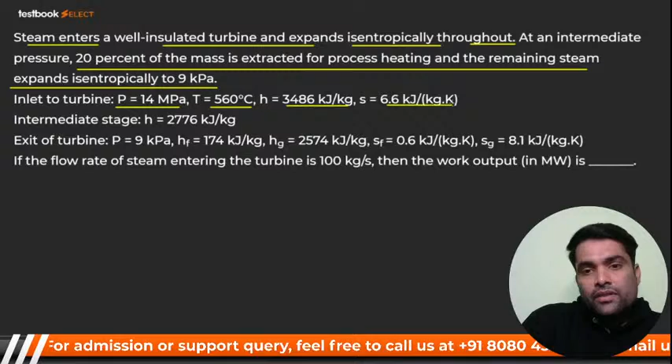Steam enters a well insulated turbine and expands isentropically throughout. At an intermediate pressure, 20% of the mass is extracted for process heating, and the remaining steam expands isentropically to 9 kilopascal. At the turbine inlet, pressure, temperature, enthalpy and entropy are given. At the intermediate stage, enthalpy is given. At the exit of the turbine, pressure is given along with enthalpy of liquid, enthalpy of vapor, entropy of liquid and entropy of vapor - these 4 properties are given.

If the flow rate of steam entering the turbine is 100 kg per second, then we have to calculate the work output in megawatt.

Good afternoon to all of you who have already joined. Now we have to calculate power in megawatt - what do we need to calculate? We have to calculate power in megawatt. So now we are going to start.

But we have to start from the diagram. So my dear, it is nothing but a case of regeneration right now.

Let me draw the diagram so that you have a clear picture of what is being said. See my dear, it is TS, it is your TS diagram. I hope it's visible to you. It's not visible, let me turn off the sticker for some time, then I'll turn it on. TS, okay bacha party, see. Now I'll draw the TS diagram, see here.

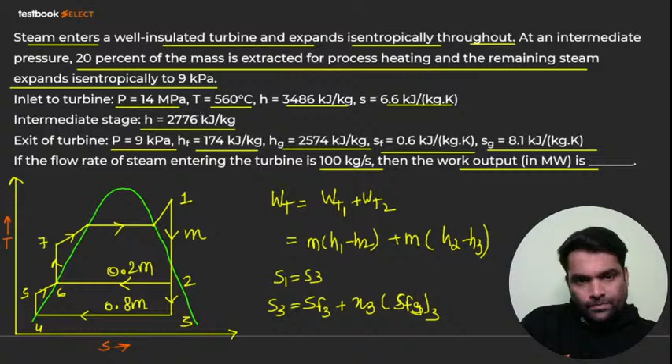H1 is 3486 minus H2. How you can calculate H2? H2 is 2776. Right, given in the question itself. See.

Plus 0.8, because 20% was removed from here. H2 2776 minus 2094, you'll get W net.

It will be around, how much is it coming? What is the magnitude? 125.560. 125560 kilowatt, you can convert it into megawatt, that should be 125.56 megawatt. This will be the required answer.

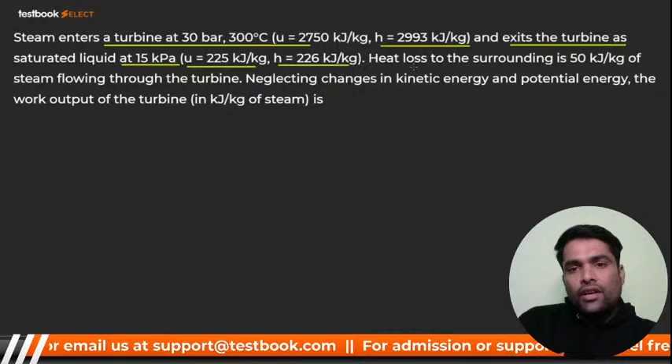Another question. Steam enters a turbine at 30 bar, 300 degrees centigrade. Enthalpy, specific enthalpy and specific internal energy are given, and exits the turbine as saturated liquid at pressure 15 kilopascal. Specific internal energy, specific enthalpy given. Heat loss due to surrounding is 50 kilojoule per kg of steam flowing through the turbine. Neglecting changes in kinetic and potential energy, the work output of the turbine is?

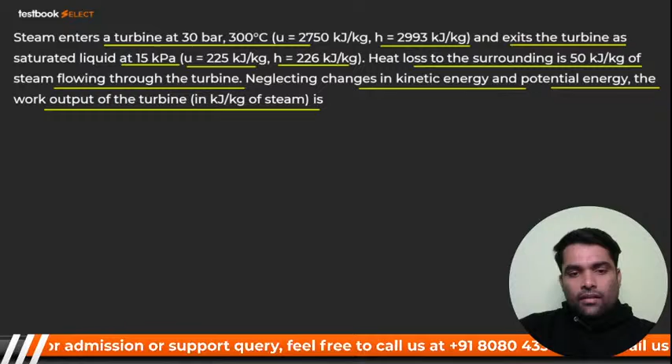Yes Muthu, can you tell me how we can solve? It's very simple. H1 and H2 are given. See, H1 is how much? 2993. They have given H2, that is 226, right?

Q is given. Q is how much? Heat loss minus 50. And we have to calculate work done. So, neglecting kinetic and potential energy, steady flow energy equation is H1 plus Q is equal to H2 plus W.

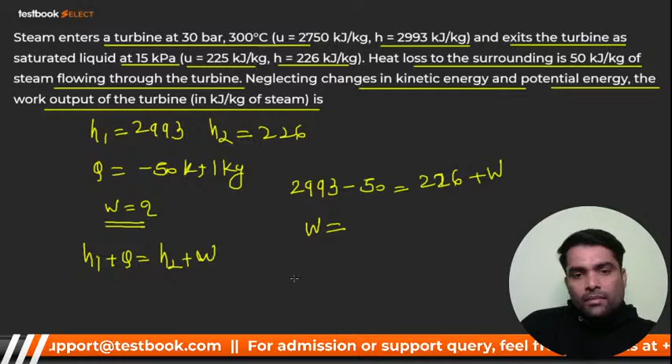So H1, that is 2993, minus 50, because it's rejection now, equals H2, which is 226, plus W. From here you'll get W, and your W will come around 2717 kilojoule per kg, and this will be your required answer.

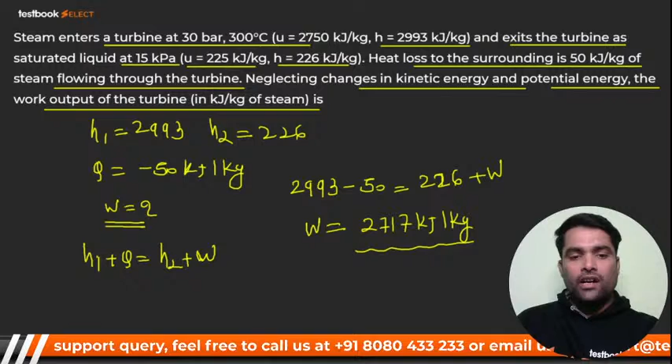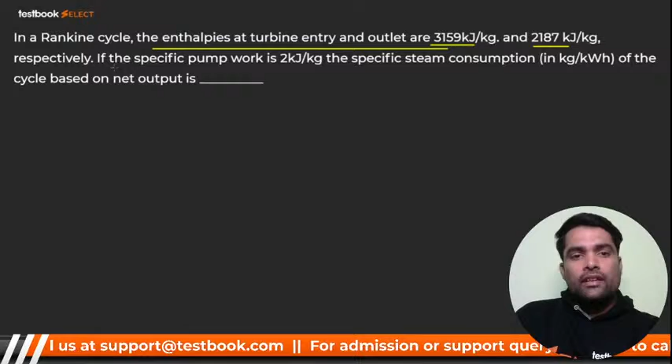In a Rankine cycle, the enthalpies at turbine entry and outlet are given respectively. If the specific pump work is 2 kilojoule per kg, pump work is also given, that is WP.

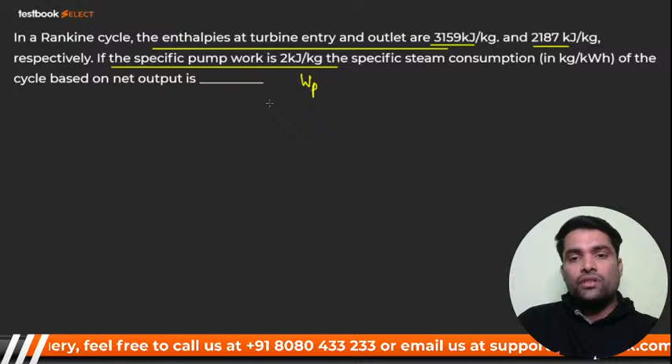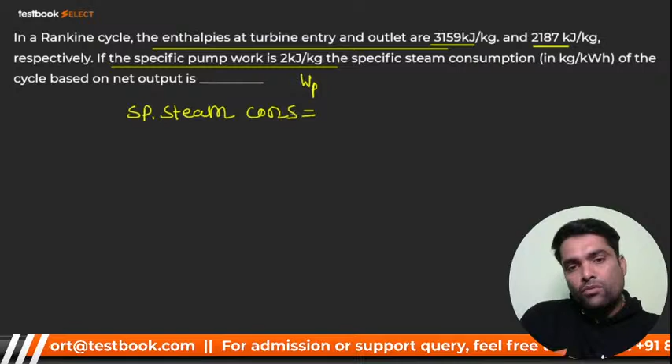We have to calculate specific steam consumption. That I already told you, is nothing but 3600 divided by W net, kg per kilowatt hour.

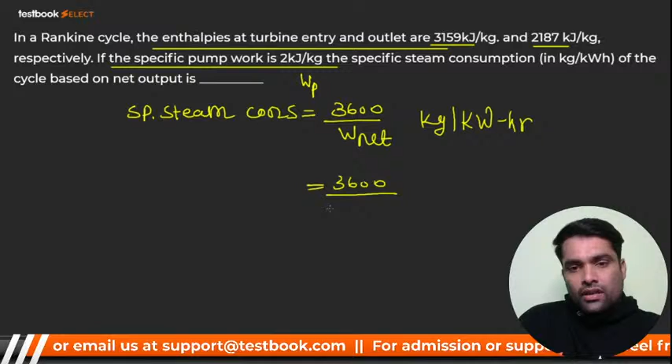So 3600 by W net, they have given, it will be 3159 minus 2187 minus 2. Now you have the answer, the answer is 3.71 kg per kilowatt hour.

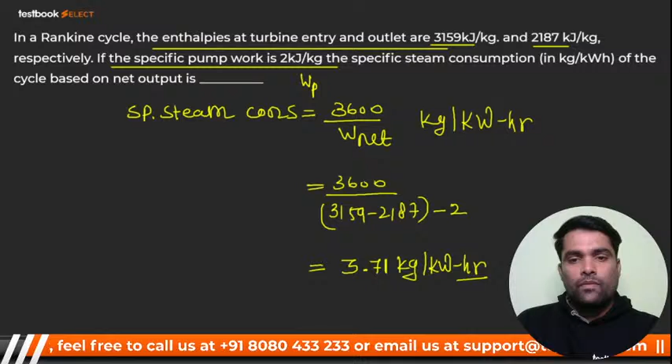In a steam power plant operating on an ideal Rankine cycle, superheated steam enters the turbine at 3 megapascal and 350 degrees centigrade. The condenser pressure is 75 kilopascal. We have to find the thermal efficiency of the cycle in percentage, and they have given some data and properties over here.

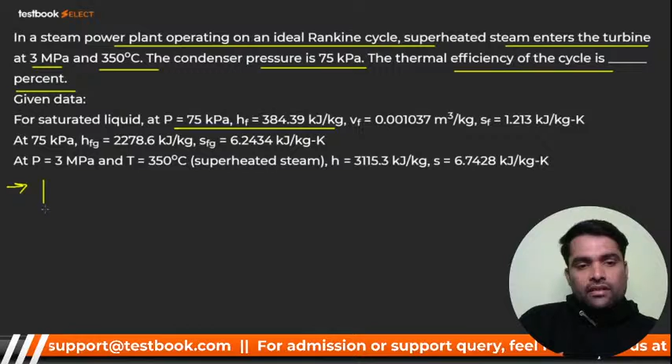We have to calculate thermal efficiency. So how we can calculate? It's very simple, funda. Let me draw the diagram first. See, this is your TS diagram.

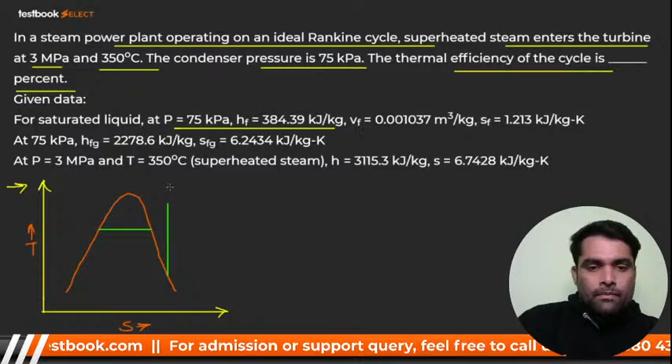One, two, three, four.

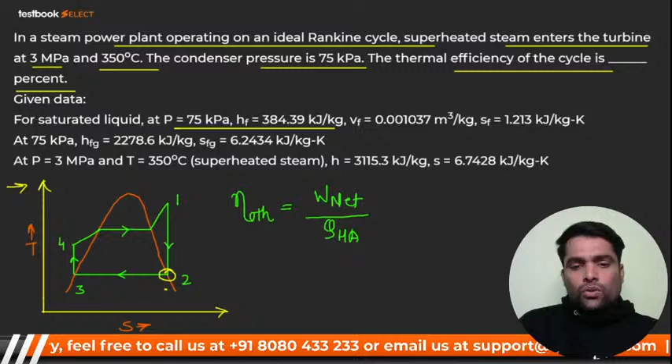H1 we know, it is given, right? 3 megapascal. This H1 is given, right? We don't know S2. But you know that S1 is equal to S2, right? And S1 is how much? S1 is 6.7428. I can write S2 in the form of what, my dear?

SF2 plus X2 into SFG2, right? So my dear, I can write it like: 6.7428 is equal to SF2. So my dear, see SF2, point number 2, which is at where? Let me check, it is how much? It is SF2, that is 1.213. Very good. Here, again I'll write over here, that is 1.213 plus X2.

What is SFG? SFG means SG minus SF. So it is none other than what, bacha? Here it is given, you can see this, my dear. So you can directly write 6.2434. Right, my dear. From here you will get X2, and your X2 will come around - how much is it coming, bacha? 0.8857.

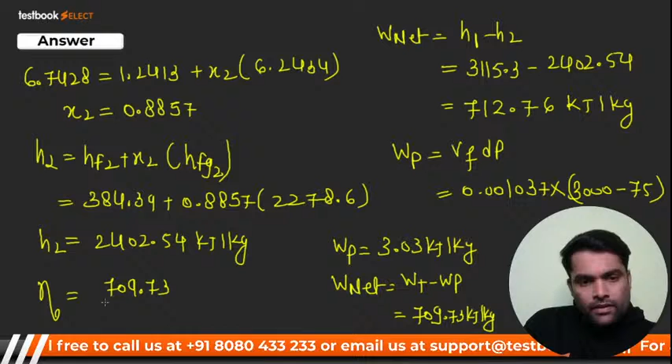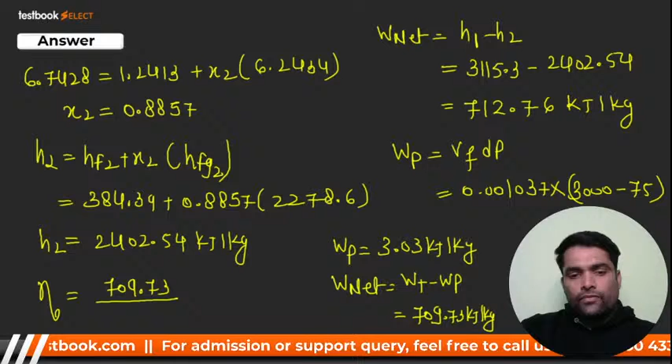Okay, efficiency will be, my dear, then 709.73. Heat added, how much will it be here? Yes, that should be H1 minus H4. Very good, that is heat added. We don't know about it. So my dear, heat added will be nothing but H1 minus H4. You can see in the diagram, right?

But my dear, WP is nothing but what? WP is H4 minus H3, right? That is 3.03. So from here, my dear, you'll get it, because you know H3. H3 is how much? H3 is nothing but HF, at 75 kilopascal.

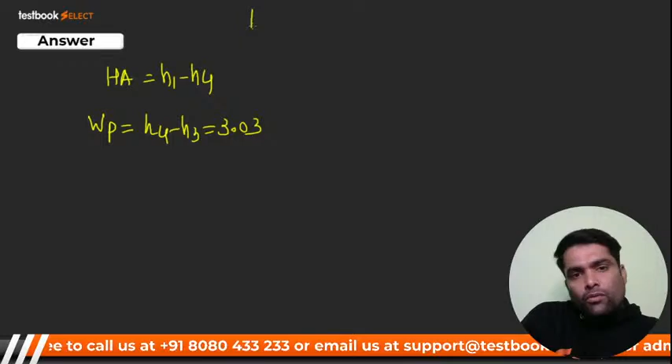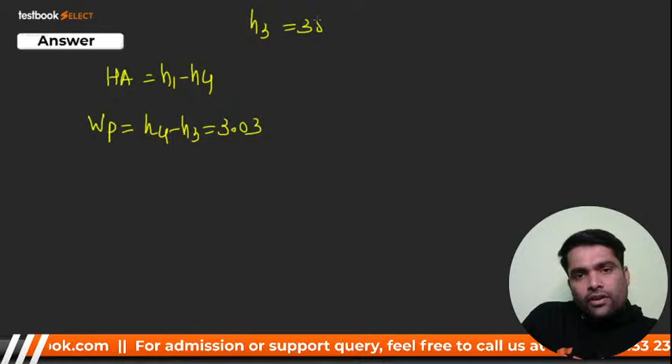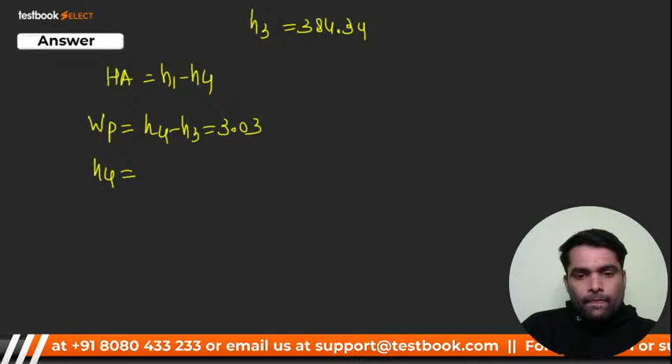What is H3? You can check it out in the diagram. H3 means HF at 75 kilopascal. That is none other than 384.39. So my dear, H3 is 384.39. From here I'll get H4. H4 will come around 387.42. This is your H4.

If you got H4, now my dear, you'll get Q heat added. That is none other than H1, which you know already. H1 we have the value, 3115.3.

Whatever it may be, minus 387.42. So, my dear, efficiency will be 709.73 divided by 3115.3 minus 387.42, and eta will be how much? That is 26.01. Okay, this is the required answer. Yes, it's quite lengthy, but that is quite easy.

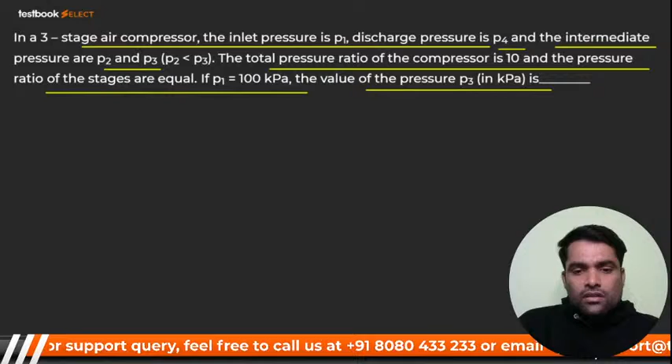Okay, bacha party, I hope you got it. Here I go for the next one. In a three-stage air compressor, the inlet pressure P1, discharge pressure P4, and intermediate pressures P2 and P3, with P2 less than P3. The total pressure ratio of the compressor is 10. The pressure ratio of the stages are equal. If P1 is equal to 100 kilopascal, find the value of P3 in kilopascal.

How can we see this? Let me tell you. What is the arrangement? Here we have a three-stage compressor, three compressors connected in line: C1, C2, C3. Here pressure P1, here pressure P2, here pressure P3, here pressure P4. They said P2 by P1 is equal to P3 by P2, which is equal to what, my dear? P4 by P3. Am I right? This is what is being said. Now we have to calculate P3, right? What do we need to calculate?

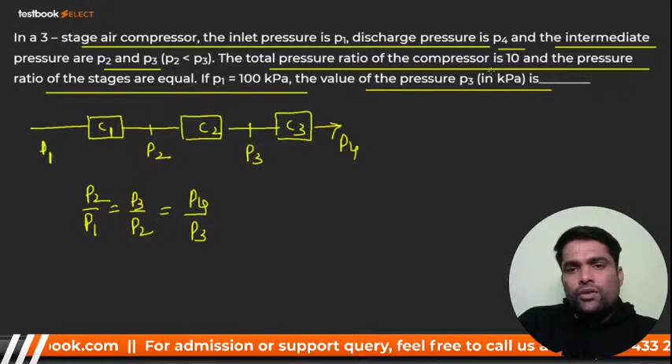Okay, so my dear, now listen to me very carefully. P3 is equal to, if P2 by P1 is equal to this value, so can I say this is the pressure ratio? So can I say P2 is equal to pressure ratio into P1, right? Of course I can say. Now, P3 will become what, my dear? Number of stages, what will it become? P3 is equal to P1, that is 100 multiplied by 10 raised to power 2 by 3. So how much will it come to? It comes around 464.14 kilopascal. And this we have already seen.

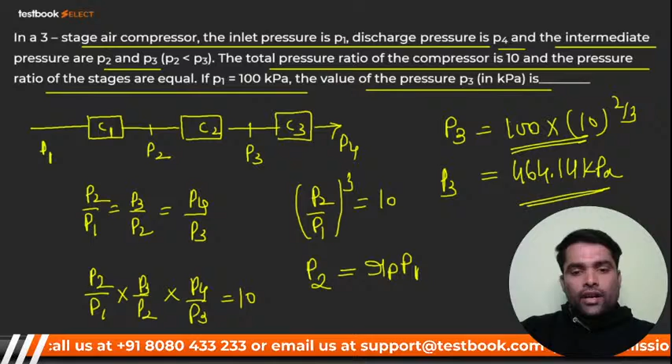Where have we seen it? We have already seen this in centrifugal multi-staging, right? We saw that thing there. Very good. Yes, guys, had you got it? If you got it, then please tell me. If you have any doubt, then please let me know, my dear. We'll go for the next one.

In the Rankine cycle of the steam power plant, the turbine entry and exit enthalpies are given. The enthalpies of water at pump entry and exit are also given. They are asking for specific steam consumption.

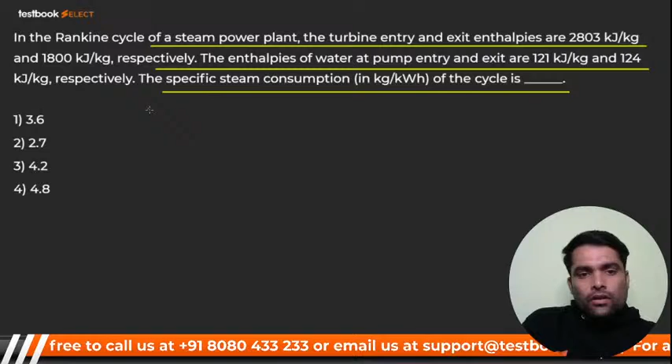Let's see what happens. You know that WT will be what? 2803 minus... very simple question, that gives us this, that means what?

1003. WP will be what? 121 minus 124, that is what? 3 again. 124 minus 121, that is again 3. So W net will be what? 1003 minus 3, that is 1000.

Specific steam consumption, SSC, that is nothing but 3600 divided by W net, that is 1000. So what will this become? 3.6 kg per kilowatt hour, right?

I hope you got it. Very good, that's a very simple question. Okay, now I'll go for the next one.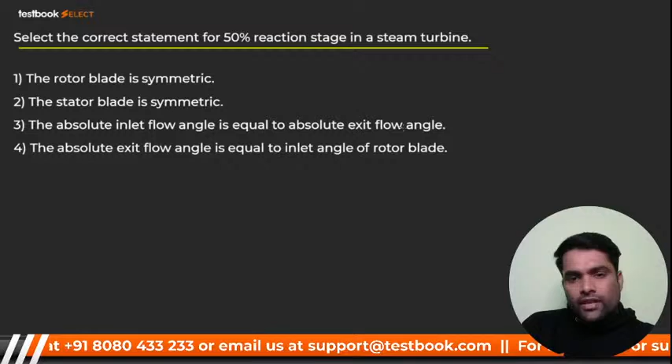Is rotor blade symmetric? No. Is the stator blade symmetric? No. Is the absolute inlet flow angle equal to the absolute exit flow angle? No. Is the absolute exit flow angle equal to the inlet? Yes or no, what happens in this?

Alpha 1 is equal to beta 2. Alpha 2 is equal to beta 1. VR1 is equal to what? V2. VR2 is equal to V1. This is the condition, right now?

So this will be what? Option number 4 is going to be correct answer, right? Yes or no? Had you got it?

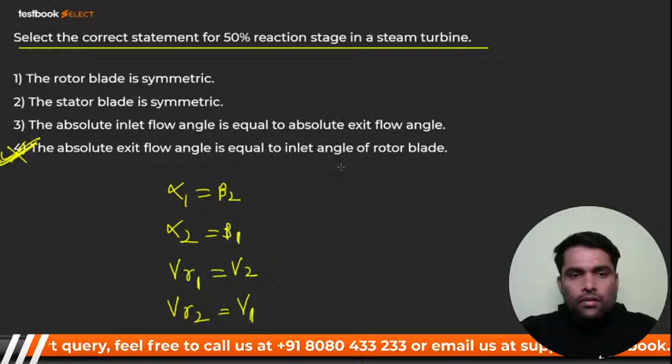Are you able to understand? Yes or no, please tell me. Okay, let's move on. Next question please, see. Wait.

A gas turbine with air as working fluid has an isentropic efficiency of 0.7 when operating at a pressure ratio of 3. Now the pressure ratio of the turbine is increased to 5 while maintaining the same inlet condition. Assume air as a perfect gas with specific heat ratio gamma 1.4. If the specific work output remains the same for both cases, the isentropic efficiency of the turbine at...

The value of gamma is 1.4, and specific work output remains the same. Isentropic efficiency of turbine at the pressure ratio of 5 is what we have to calculate, my dear.

So first we are going to see, because we have two cases over here, we'll see the cases one by one, taking them one at a time, right? So first of all, let me draw the diagram.

So the diagram will be like this only, let's draw it here. I hope it's visible to you, let me check... okay that's very good, it's visible. So, see.

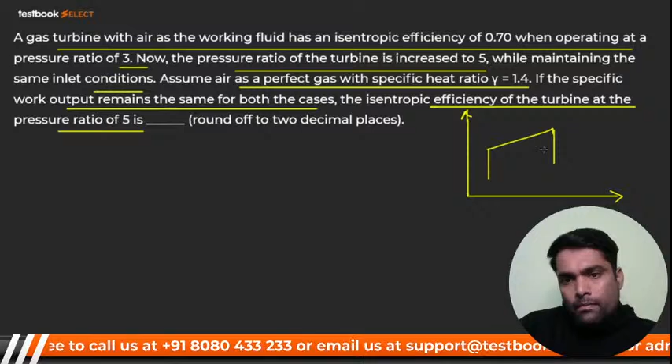Okay, it is 1, it is 2, it is 3, what? It should be 4 and 4 dash, 4 and 4 dash. It is T, it is S, right? Now, see.

Now I will write the expression for the isentropic efficiency. Yes, anybody have any doubts, please let me know. Okay, so here I go.

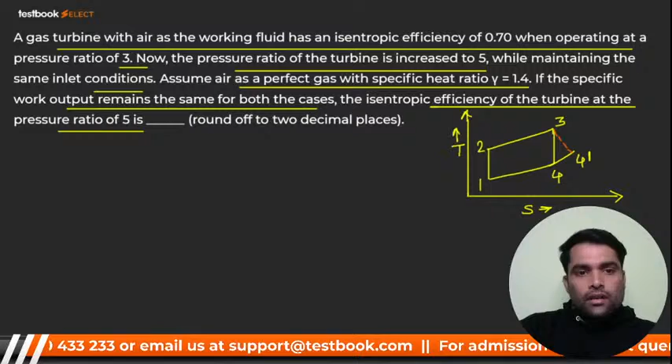So what will it be? What is the turbine's efficiency? It should be T3 minus T4 upon T3 minus... it should be T3 minus T4 dash. I'm sorry, the isentropic efficiency of turbine is what? It should be T3 minus T4 dash divided by T3 minus T4, right? Because ideally the work will be more, right? Yes or no?

Of course it should be. Okay, if you got this point, now I'll go. Pressure ratio is 3, gamma is 1.4, right? So I'll put the values. But before that, I'm going to calculate T4.

Let's find the relation between T4 and T3. Now you know T4 by T3 will be what? It should be P4 by P3 raised to power gamma minus 1 upon gamma. So that will be nothing but equal to P4 by P3.

How much is it? It is given in the question, right? Pressure ratio is given. That is none other than 3. How much is given? 3. Okay, of course it is, right?

So see the diagram. Now P4 by P3, but they have given us P3 by P4, no? So it should be what? P3 by P4, that is what? P4 by P3. So here what will we take? 1 upon 3 raised to power 0.4 divided by 1.4, right?

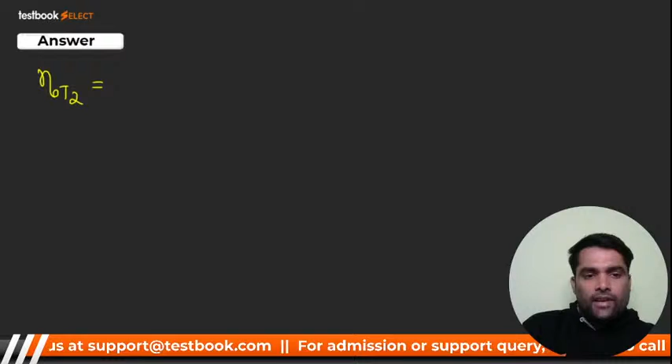Now we'll go for the second case. First case we've seen, now let's see the second case of turbine, right? Now the pressure ratio is how much? 5. So again pressure ratio is 5, no?

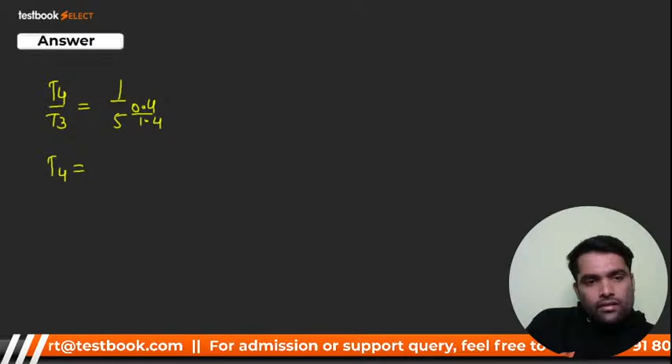So can I say again T4 by T3 is equal to 1 upon 5 raised to power 0.4 divided by 1.4? So from here I'll get T4, and this T4 is equal to how much? This T4 is equal to 0.631385 T3, right? Now I have efficiency for turbine 2.

So that is nothing but T3 minus T4. So here I'll put T3 minus T4 dash, it is what? 0.631385 T3, right? This is your second equation, okay.

So this is your efficiency in the second case. Now we got efficiencies in both the cases, right? Now what I'll do, I will equate them. And they said specific work output is same for both the cases, right?

That means specific work output is same in both the cases, right? Work output will remain same now. So here I will write H3 minus H4 dash in first case is equal to H3 minus H4 dash in second case. It will be equal in first or second case.

Now, can I say like this? That means if it is equal, can I say T3 minus T4 dash in first case is equal to T3 minus T4 dash in second case, right? If it is so.

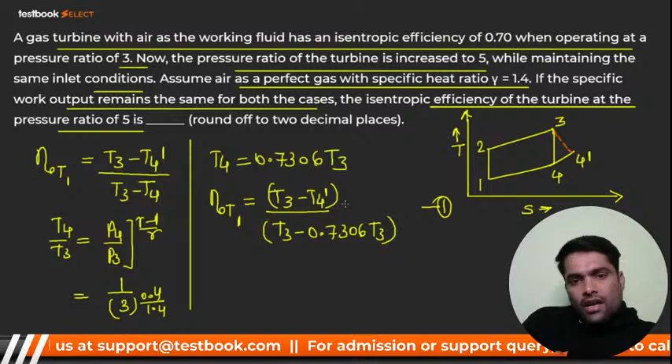It is what? Again I am telling you, this is T3 minus T4 dash, right, for first case and second case, both are equal, right now. So what will we get? What will I get? I'm going to get 1 minus 0.7306. What will remain with me?

1 minus 0.7306 T3, divided by 1 minus 0.631385 T3. These terms will cancel out now. So we get a ratio - the ratio will be 0.73084. If you get this ratio, eta 2 is nothing but 0.73084 times.

So eta t2 will be what? 0.73084 multiplied by eta t1. And eta t1 is what? So eta t2 equals 0.73084 multiplied by 0.7. From here you'll get the answer, and the answer will come 0.5116.

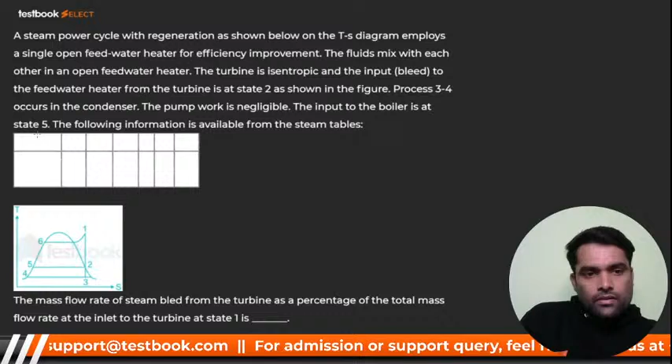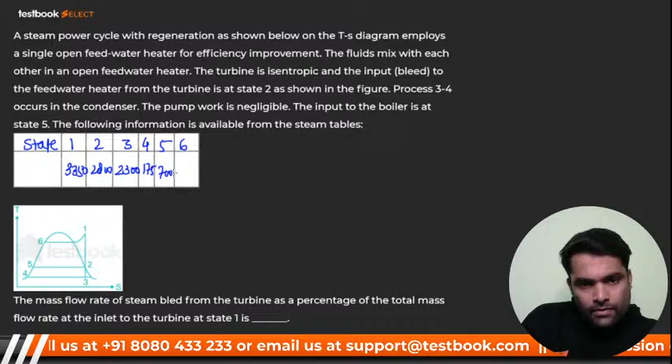And these are enthalpies in kilojoule per kg, that is small h. States are given, each and everything, the diagram is given, right?

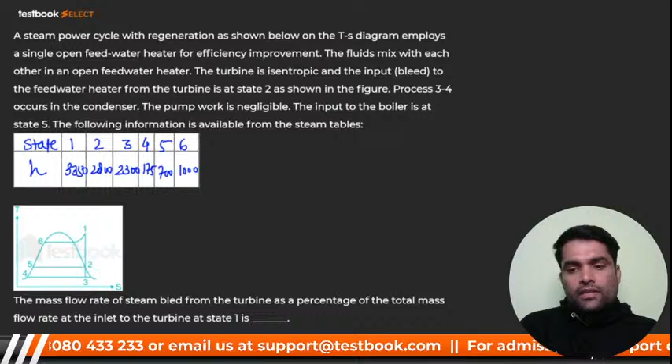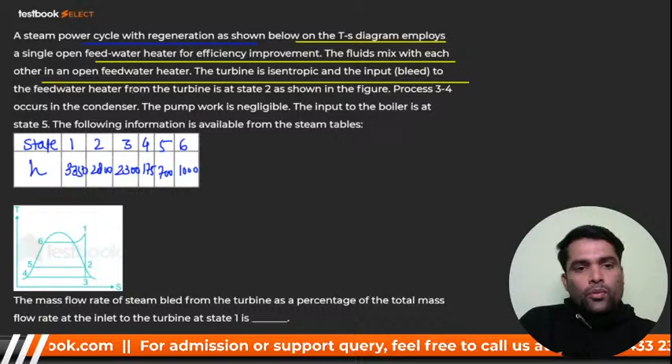So now we have to calculate what they said: a steam power cycle with regeneration as shown below in the T-S diagram employs a single feed water heater for efficiency improvement. The fluids mix with each other in an open feed water heater. The turbine is isentropic, and the input to the feed water heater from the turbine is at state 2 as shown in the figure. The process 3-4 occurs in the condenser. The pump work is negligible, that is Wp equals 0. The input to the boiler is at state 5. The following information is available.

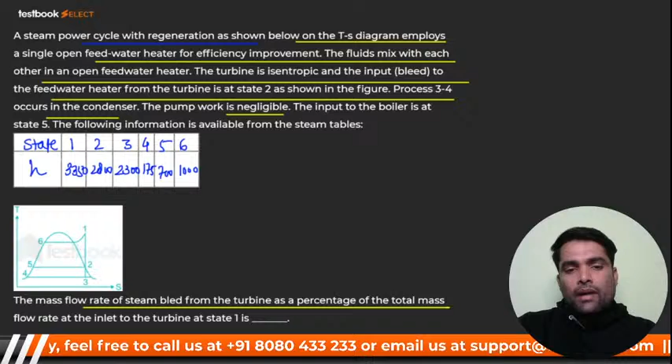The mass flow rate of steam bleed from the turbine as a percentage of total mass flow rate at the inlet to the turbine, state 1, is given. We have to calculate the mass that we extract for heating purpose.

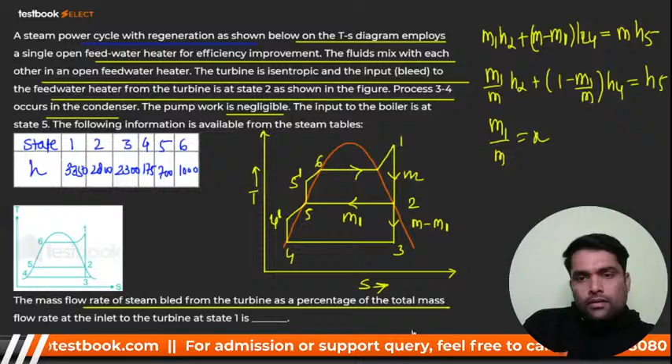I'll get M1 by M into H2 plus 1 minus M1 by M into H4 equals H5. I'll put in the values and get the answer. Let's take M1 by M as X. So X into H2 plus 1 minus X into H4 equals H5.

OK, so can I write directly X into H2 minus H4 equals H5 minus H4? Of course I can write this. If you write this, you will get X.

Now you will get X, and that equals H5 minus H4 divided by H2 minus H4. So H5 is already given as 700, H4 is 175, H2 is 2800, minus 175. You'll get X. How much will X be? X will be 0.2.

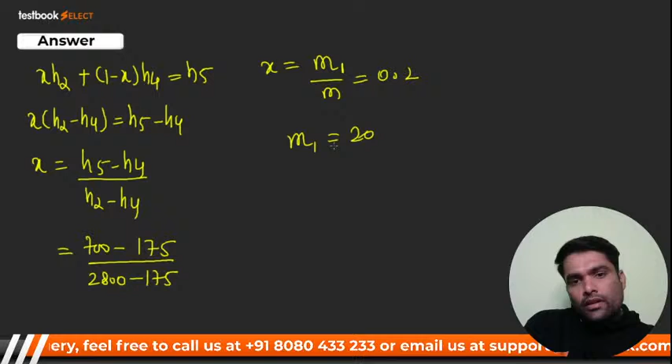That is 0.2, which is 20 percent. X is nothing but M1 by M, and that comes to 0.2. So M1 will be 20. This will be the correct option, 20. Very good, Mahendra. M1 will be 20 percent. Remember, your answer should be 20 percent. Now let's move ahead.

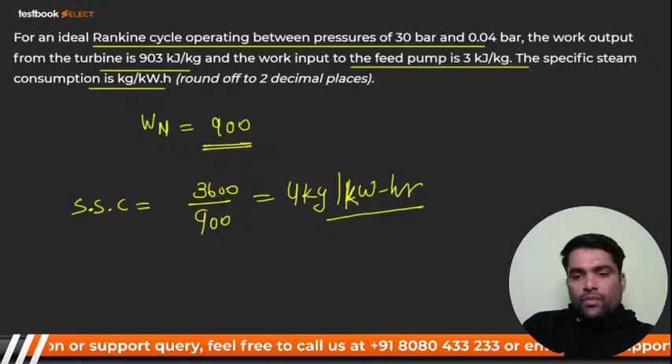An ideal gas enters a perfectly insulated compressor at temperature of 310 Kelvin. Pressure ratio of the compressor is 6. Specific heat at constant pressure of air is 1005 joule per kg Kelvin. Ratio of specific heat at constant pressure to constant volume, that is gamma, is 1.4. Assuming specific heats of air are constant, the isentropic efficiency of compressor is 85%. Find the difference in enthalpies of air between exit and inlet of compressor, in kilojoule per kg, rounded off to nearest integer.

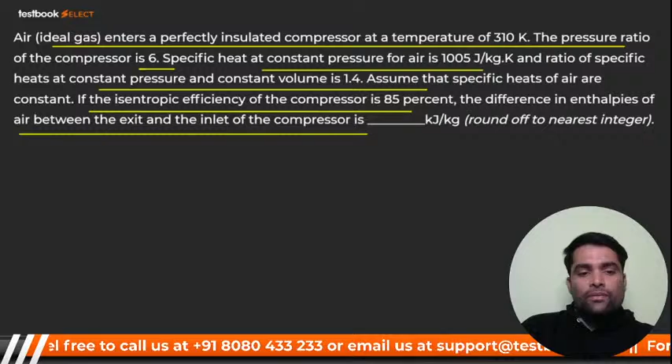How can we solve this? It's very simple, nothing much in this question. I'll repeat once again, they are asking for the isentropic efficiency. So this is our Brayton cycle.

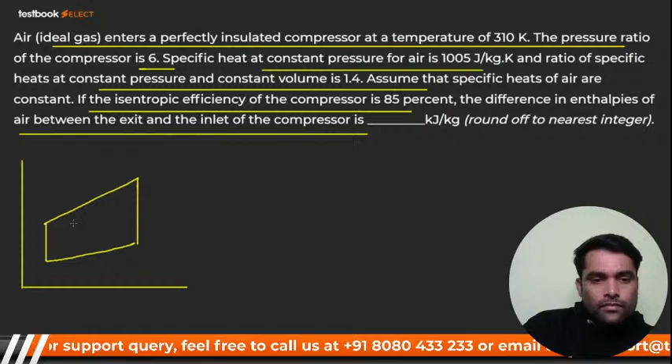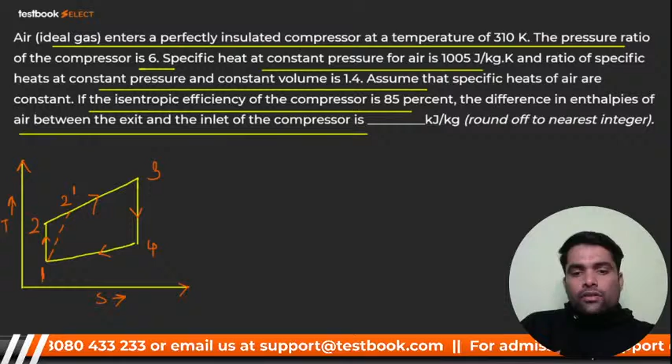This will be your actual cycle, going 1-2-2 dash-3-4. Now it will be like this on the TS diagram. So if it is TS, then here, what will this be? H2 minus H1 upon H2 dash minus H1, right?

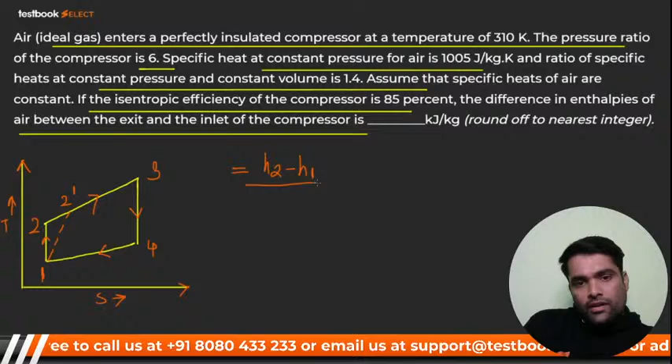Now very good. It should be H2 minus H1 divided by H2 dash minus H1, and that is nothing but W ideal upon W actual.

W actual will be more than W ideal, right? W actual is nothing but W ideal divided by efficiency of compressor. W ideal you can get as Cp into T2 minus T1. So Cp into T2 minus T1 divided by eta compressor, and that will be around... how much is that?

So here I'll go, that is Cp equals 1005, T2, let me check how much it is. It is 310. What about the ideal gas enthalpy? What is the actual value? 517.22, right?

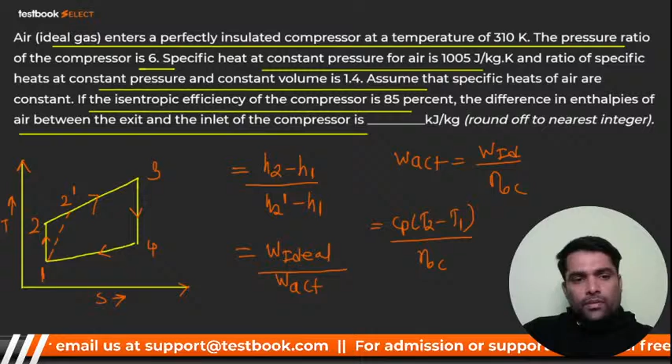T2 we have to find out, we still haven't found T2, right? T2 we don't have yet. So we have to find T2. T1 we know is 310, and it is 0.85.

T2 by T1 is nothing but P2 by P1 raised to power gamma minus 1 upon gamma. Gamma is 1.4. From T2 by T1 equals pressure ratio, how much is the pressure ratio? Pressure ratio is given as 6. So it's 6 raised to power 0.4 divided by 1.4.

From here you'll get T2, and that will come around 517.22. You'll put the value, that is 517.22, and you'll get W actual, which will be around 245 kilojoule per kg. This will be the required answer.

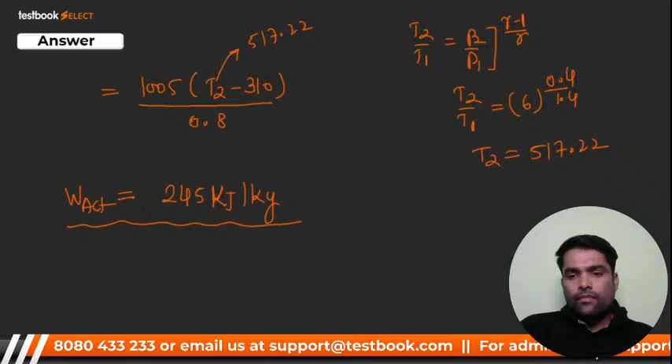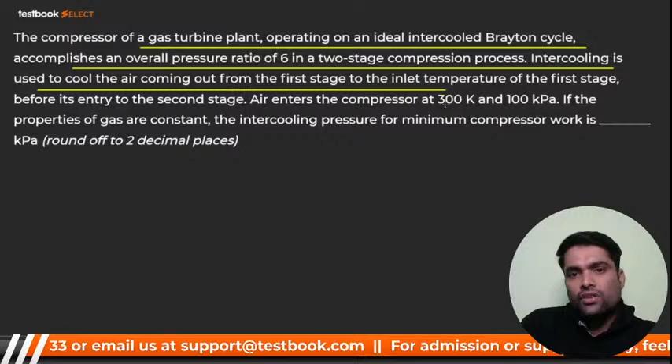Listen to me very carefully. The compressor of a gas turbine plant operating on an ideal intercooled Brayton cycle accomplishes an overall pressure ratio of 6 in two-stage compression process. Intercooling is used to cool the air coming out of first stage to the inlet temperature of the first stage before its entry to the second stage. Air enters the compressor at 300 Kelvin and 100 kilopascal. If the properties of gas are constant, find the intercooling pressure for minimum compressor work.

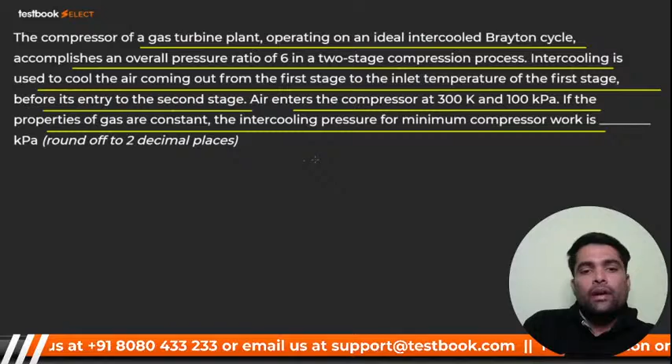You know that P2 is nothing but under root of P1 P3. We have already studied this. That is 100 into how much? It's a 2 stage problem, right? Intercooling between overall pressure ratio 6, 2 stage compression, right. So first stage, we have to calculate that.

How much will P3 by P1 be? P3 will be 600. Good afternoon Tanmay Soni, most welcome. So intermediate pressure, P3 will be what? P3 will be P1, that is 100. What is the ratio given, 6? That is 600.

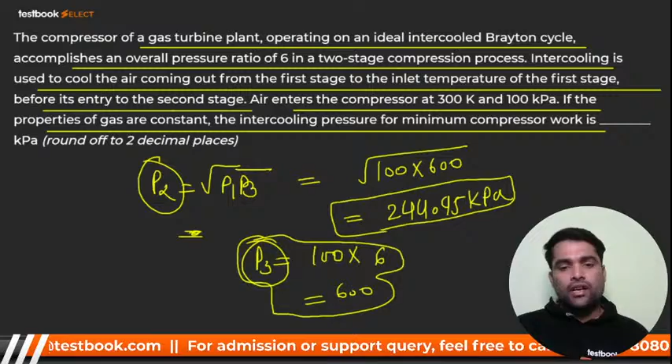First you were given the pressure ratio 6. By the help of that you can find P3, and once you get P3, you know that for minimum work input, the condition is that intermediate pressure or intercooling pressure is nothing but under root of the product of lower and maximum pressure. I hope you got it. Tanmay Soni, you are most welcome in the session. Okay, so now we'll go for the next one.

Which one of the following is the incorrect statement about regeneration in vapor power cycle? Incorrect, remember, incorrect statement we have to choose regarding vapor power cycle. Be fast. See, I'll read the questions.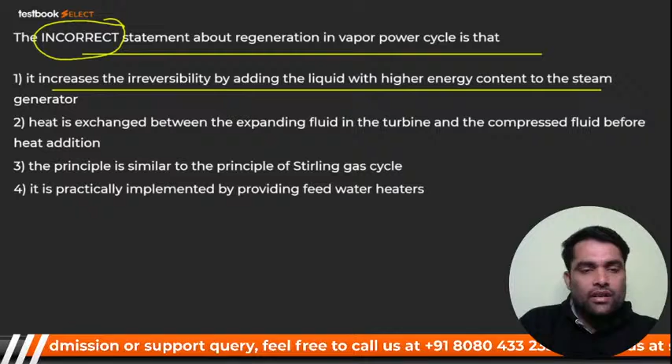It increases the irreversibility by adding the liquid with a higher energy content to the steam generator. Heat exchange between expanding fluid in the turbine and compressed fluid - right, there is no issue, it's correct. I think this is incorrect: increase the irreversibility by adding liquid with a higher energy content - no, no, no, it does not. That is number 1, which is incorrect.

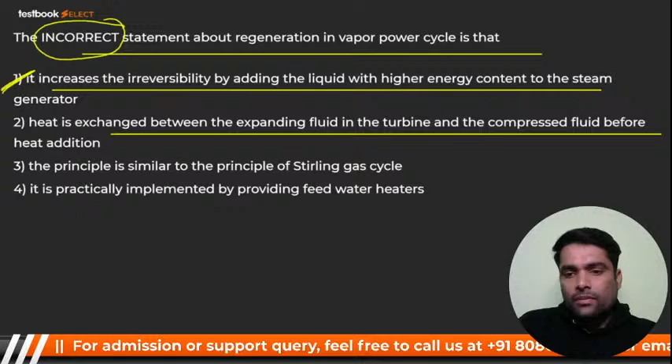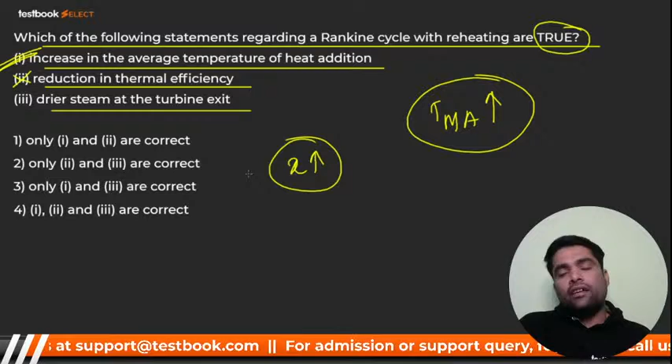Dry steam at the turbine exit - definitely the dryness fraction has been improved by reheating. How this happens, I will explain. So number 1 and number 3 are going to be correct.